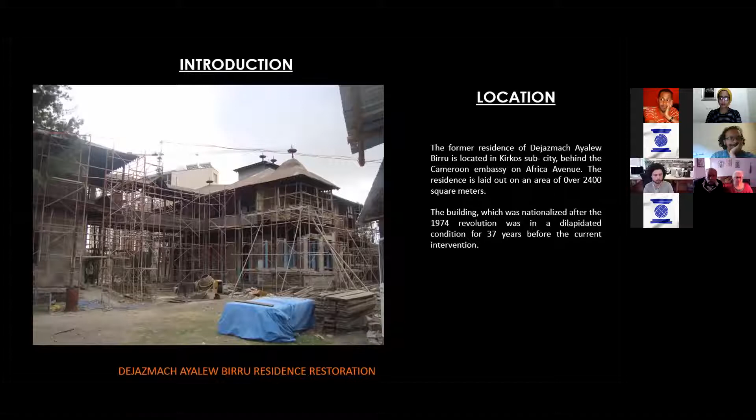So, like I said, the location is around Bole. You see this first picture, which was one of the first that we started upon. Before we embarked as an office on this project, the clients had gone through their own process of acquiring the services of a contractor, and through their tendering or selection process, they had selected Varnero, which is one of the leading construction firms in Ethiopia. So after they signed a construction agreement with the contractor, our firm was invited to come on board as lead supervisor and project manager as well for the project.

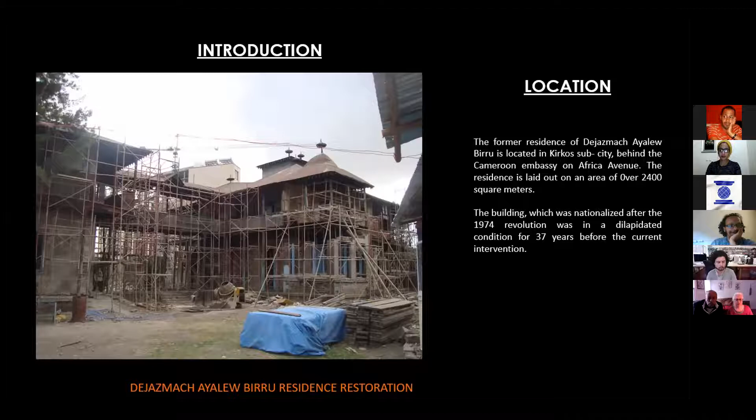So this picture that you see is the moment when we started erecting scaffolding to carefully start the renovation work. This house, like I said, is about 100 years old, and it has been abandoned. It has been in a very dilapidated condition, and the whole idea of this project was to restore it to its former age. That required a lot of structural intervention, because as you can see, except the main ground floor, which was built from masonry and was intact, the rest of the building on the upper floors and all around it, including the roof, the balconies, the bridge, and everything had to be carefully dismantled and reconstructed.

So the project had this program, and while maintaining its external image, it was also a project where the internal part had to be completely changed to cater for a new service. The developers wanted to use this as a guest house. Mind you, as caretakers, they are not allowed to use this as their own residence, because this is in a way a property of the city or the government, heritage. So they had to convert it into something that gave service to the general public. The idea was to convert it into a guest house. So with this understanding, we went into the project.

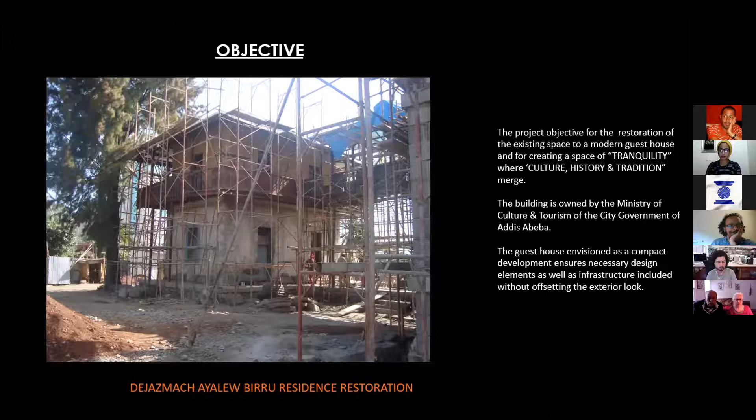The project team also included different members. We as BIGAR were the project managers, the main team overseeing the entire activity. In terms of architectural design, Architects was a firm on board, which developed certain preliminary designs on how to convert the house into a guest house. The interior designer's services were procured by the clients themselves. A firm called Gussen and Gossen, which is from Switzerland, was on board. Structural and MEP was fully our jurisdiction. It was all designed by BIGAR, and the contractor was, as I said earlier, Varnero.

So the construction of this project started in 2012, and I'm going to take you through some of the processes, what we went through, what we actually did. So some of the earliest images show how the windows looked; some of the areas, the balconies, were really in a bad condition. When we started dismantling them, the majority of the building structure is built from wood, but very strong wood. They used the traditional ted, that's in Amharic. It's a version of pine wood, very strong, and that's why it stood the test of time. But when we started dismantling the columns around verandas, the walkways and other elements, you can see the test of time had its bearing on this structure. It was really in a bad condition.

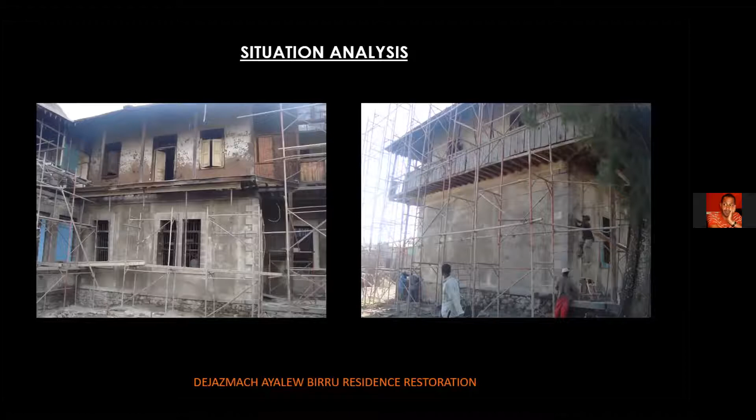On the ground floor, the building had a collection of different finish materials, some in cement plaster, some in mortar, some in different colors and so on. So to restore it to the original condition, a careful dismantling, peeling away of all these unnecessary elements was the first point of exercise. And of course, we had to be very careful not to structurally damage the building, and a full structural assessment was done before our intervention. For that, our structural design team did a careful analysis. We were guiding the process slowly so that the intervention of the contractor was carefully dictated.

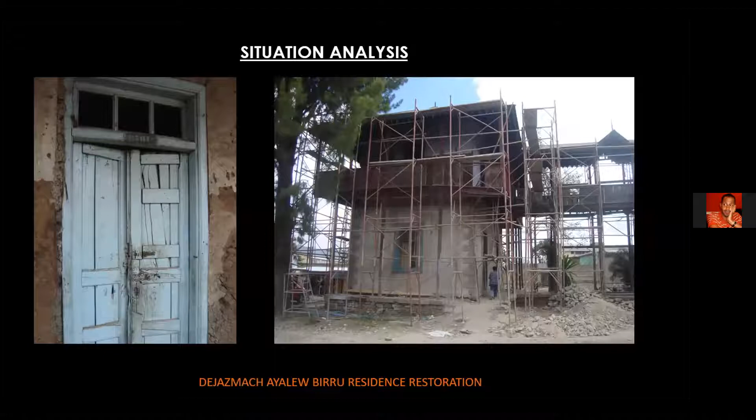We were fortunate enough to use the extensive experiences of Varnero, their wood workshop, and their craftspeople, which really helped us along the way. So first order of business, we started working both on the interior and on the exterior as well. But the strategy we adopted was we were going from the top down.

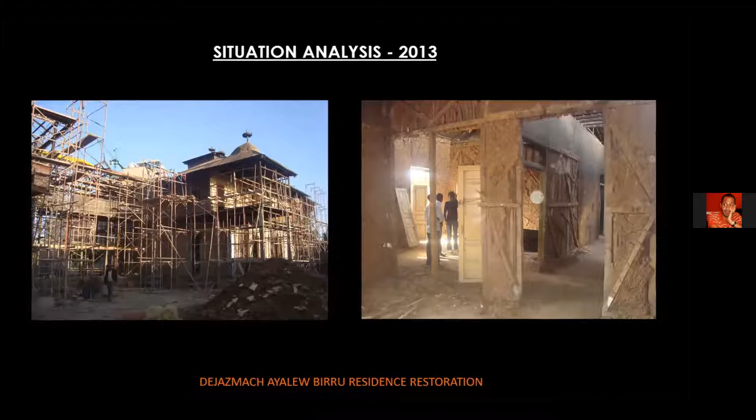So that means careful dismantling of the roof, amendment of the truss, careful replacement of these elements with equivalent material, and going down all the way to the bottom. So that's what you can see. We took down the roof on the top, and we had to replace, after cleaning, polishing, and preserving the structural truss elements, which were strong enough. So we had to redo the roof.

We kept as much of the original elements as possible. If these elements were structurally damaged or in a severe condition, we had to change them with equivalent wooden material, equivalent or stronger wooden materials, all properly polished and prepared as to the requirements of the structural engineers. On the interior side as well, we tried to preserve as many of the elements that were in good condition.

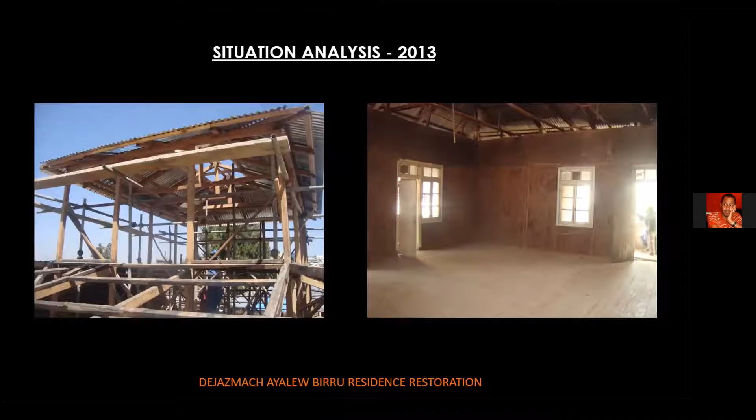So peculiarities of this project are, the upper floors are all built in a wooden structure, which were enveloped by mud plastering. The entire plastering of the wall was in mud, and of course a lime mortar applied as an exterior finish. When you go to the lower levels, it's all stone masonry, well-built stone masonry, and the entire plastering was done in lime mortar.

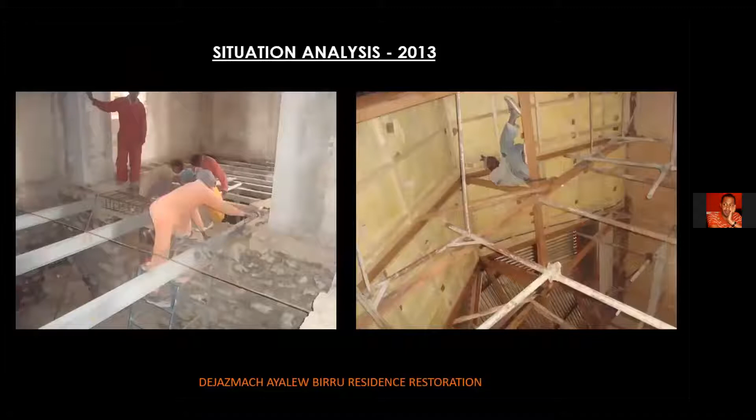And an interesting aspect of this project is it had a basement floor, all intact, but a little bit damaged, and with water encroaching, there was a lot of damp around it. So part of the engineering intervention we did was we carefully dug around the foundations of the building all around the perimeter and introduced a French drain or water drainage, so that the water can actually be diverted before it encroached on the peripheries of the building.

Simultaneously, we had to carefully do a sealing exercise of all the stone joints through cement mortar and a cementitious waterproofing chemical. It was all technically done in a very careful manner. Since some floors were damaged severely, we had to introduce structural section beams that can withstand the floor load, anticipating also the future function of this building as a guest house for quite a collection of people. We also were finishing up the roof structure.

Originally, most of the roof truss was covered by a ceiling, but we had to expose as much of it as possible so that it adds to the architectural delight. What you see on the right-hand side picture is after doing the corrugated sheet roofing, we had to do a bit of insulation on the top, so that from weathering, from sound, and from other aspects, the building is a bit comfortable. All of this will be covered with plaster boards.

So going into 2014, you can see that certain elements of the exterior, the wooden columns and others, were carefully being replaced, preparing them in the workshop, tested very well and graded to what we required. So we had to produce all of this and bring them to site and carefully start installing them on the lower levels, and simultaneously proceeding with the floor, the veranda on the upper floor, and then of course the columns following up on this.

On the interior part, we had careful introduction of wooden beams at areas that needed structural strengthening, because this intervention also required the strengthening of structural elements. Whatever was damaged had to be replaced, re-strengthened, and also catered for the services of the new function. On the interior side, you can see most of the walls all in mud plaster, and of course lime conveniently applied after that.

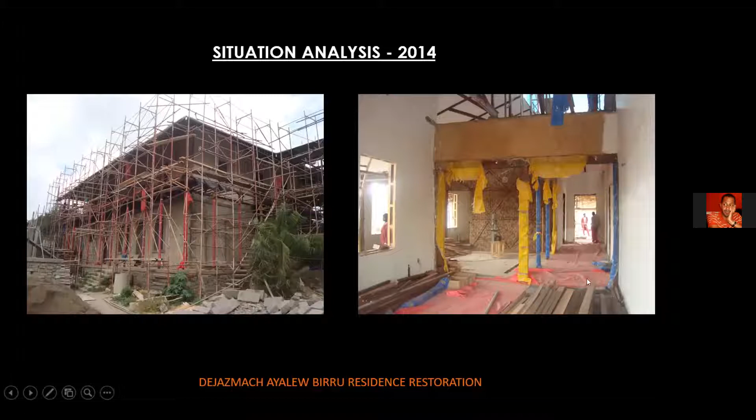Proceeding to the interior spaces, the corridors and verandas came next with the floorboards, balconies all done, and the columns also erected. On the interior spaces, the windows were a bit tricky because, when you work with a building built from mud, irregularity is an aspect we wanted to preserve. We didn't want to fashion it too much towards regularity, but to not affect the production of windows, we had to introduce wooden counter frames all around windows, label them carefully so that the windows were properly produced, and when they came to site, they fit exactly where we wanted them. So this was a very careful exercise that we did with the contractor.

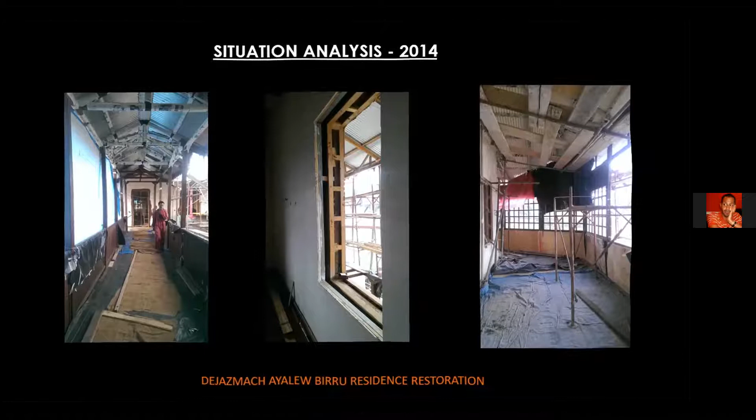Just one more thing on the previous slide: you can see in certain sections of the building where the roof truss was severely damaged, we had to literally dismantle, re-erect, and build it again so that it also connects with the structural integrity. So our structural engineer really helped in that regard, giving good direction and guidance all through the steps. This project was not done just in the office, it was mostly done on site. A lot of workshop drawings, detailed drawings, situation analysis and so on went hand in hand with the contractor's team.

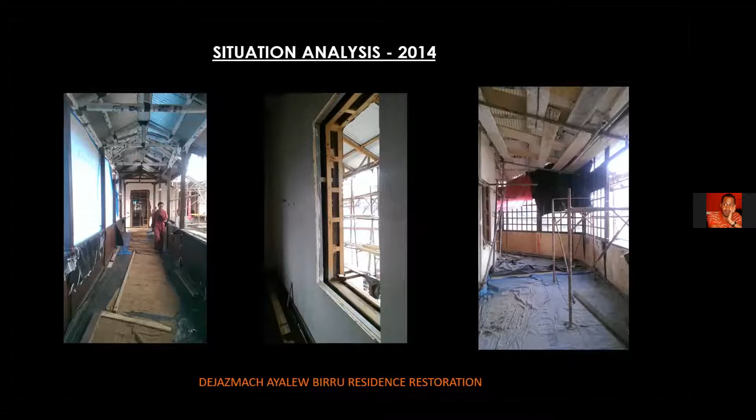So on the inside, again, in certain areas structural wooden elements were introduced, some were strengthened. The ceiling was pushed all along, following the profile of the roof, so that you get enough headroom, as well as the play of these structural elements also adds to the architectural delight.

An interesting aspect of one area: when we peeled off the layer to replaster it, to redo it, we were intrigued by the interesting shape of some of the structural elements that were behind the mud wall. So we exposed a section of it, and we preserved the mud from falling, but we preserved it in such a manner that we exposed the layer of the building, showing what was there, and we left it there as a piece of mural art.

In most areas, since this is a guest house, as you can see in the middle picture, we used boards with steel frames. Wherever we introduced water supply lines, drainage lines, areas that required future maintenance, replacement, or any unforeseen circumstances, we used plaster boards, because if you introduce this in a mud wall or in a stone wall, and then come back to chisel, you damage the very nature of the building. So for this introduction of new services, we played around with modern materials like plaster boards, conveniently helping us for future maintenance.

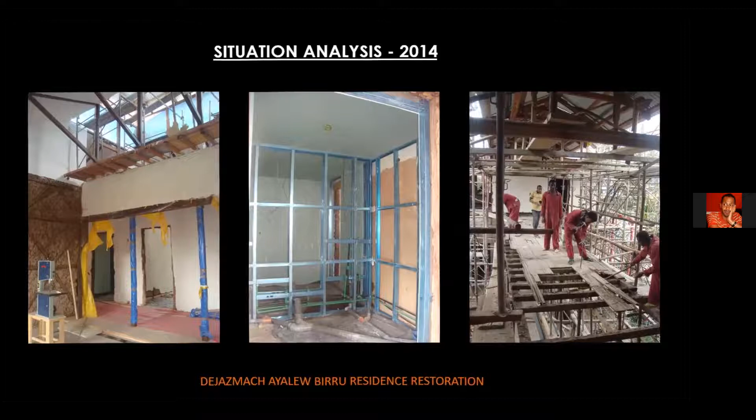So going further, here you can see the middle bridge, which was dismantled at the beginning, had been re-erected. A very interesting thing is, if you look at the image on the left side, we had to take down this element that's in the middle of the picture. It's like a veranda; it used to be a room, but we converted it into a veranda, a sitting space. And we had taken down each stone step by step. We labeled it, we polished, cleaned it, and we rebuilt it again exactly like it was.

But we had to take it down and properly anchor it with the ground and rebuild it from the ground up, because there was a bit of a challenge structurally, originally, because of certain defects that we found in the foundation. So this was all amended and rebuilt from the ground up exactly the way it was in the beginning. On the upper parts, the wooden columns continued, and the corrugated sheet, of course, is covering up the top parts.

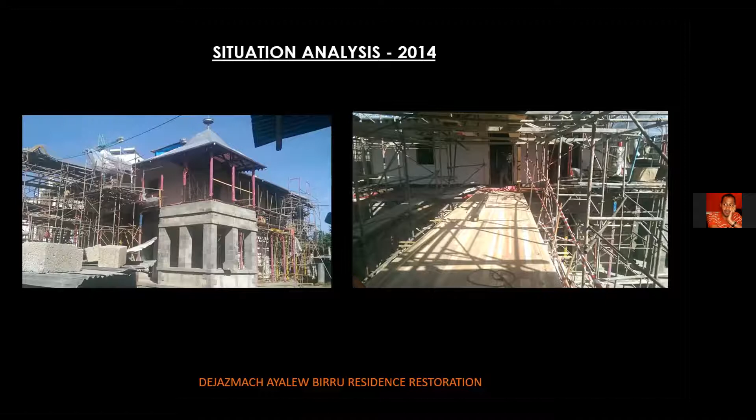So this is one of our favorite spaces in this house. If you looked at the original images, this was all covered in corrugated sheet. It was an abandoned space, but most of these things that were built during the 1900s had, in some of them, these typical clerestory lights; light comes in through the top section. They played very well with colored glass windows. So we also created a system where we brought this gallery of light into the interior, and all of this goes right onto the corridor, leading into the sitting room of the first floor. So the brilliant play of light, especially in the afternoon, is a delight to look at.

All of the truss that you see was original. It was from 100 years ago. We just took away the corrugated sheet, replaced it, and we polished all of the wood. Look, some of the wood is a bit irregular, right? It looks a bit organic. This was the original truss. We just preserved it, we polished it, we varnished it, and we used oil for marine wood and so on, to strengthen it and keep its color. But when you look at it, it's pretty much what was there, but this time it is exposed to add architectural delight.

Of course, going into 2015, the building slowly starts taking shape. Imagine 2012 to 2015, 3 years, careful exercise. Everything had to be done carefully, dismantled, re-erected, and put to resemble its original condition. If you look at the image on the left-hand side, the villa with the gallery of glass that you see, it was not in that condition. It was completely destroyed when we started on our original restoration.

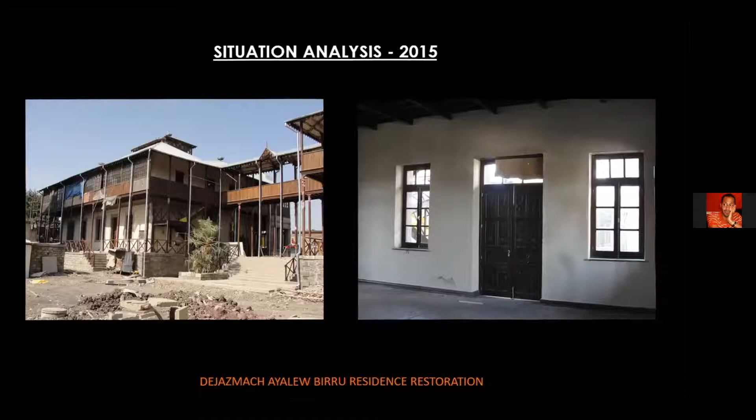The whole area where this building rests is over 2,400 square meters. It's just about in the middle of this property. So it allowed us to play with a lot of landscaping around it.

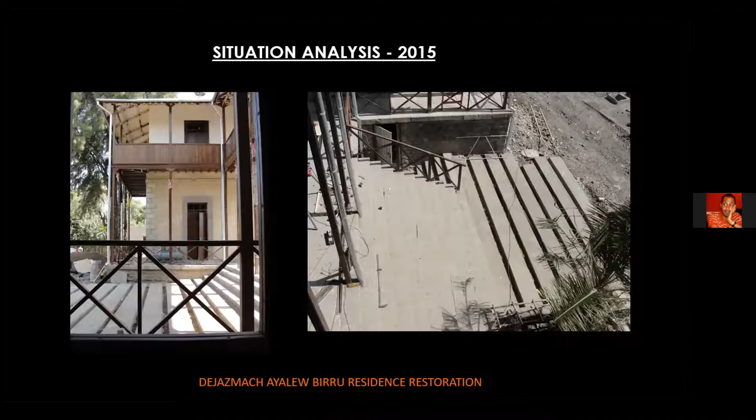Interior spaces taking shape, the doors all fitting, the glass allowed a little bit of transparency. The space which we were going to fashion into a sitting corner for coffee ceremony and others was taking shape. On the side, if you have noticed, we have put insulation on the roofing structure, for heat, for sound and so on. On the corridors, we just painted the corrugated sheet in white color. The contrast with the dark brown of the wood was just excellent. The wood is always amplified, and it was the main element of the architecture.

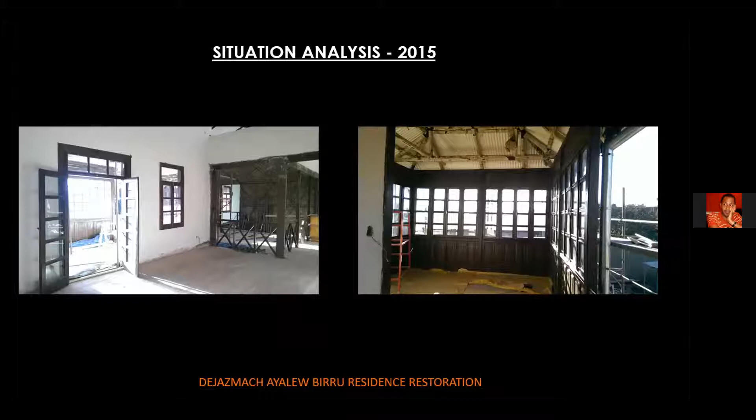So again, the wood and the craftsmanship was really a beauty, a delight in this building. The perfection, the execution, all of what you see there, we produced all the detailings, all the specifications, right down to the type of member to be used. And we are really grateful to the team of Varnero, without whom this project would never have been achieved.

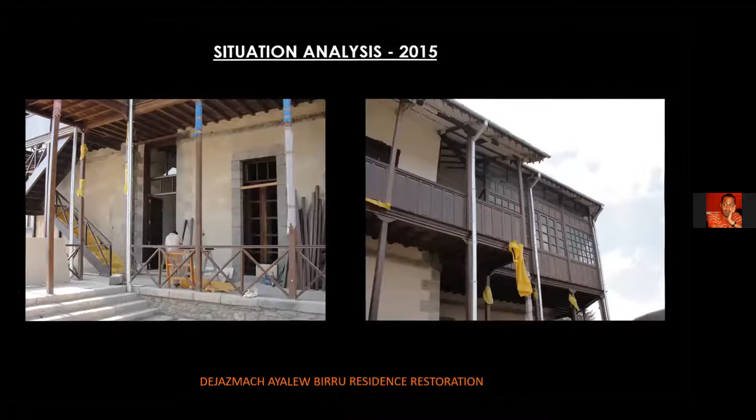Building taking shape, most of the wooden elements from the outside varnished. By the way, it was a continuous journey of rectification as well, because some of the columns we delivered had a little bit of warp in them. These were seasoned wood. They had to be prepared in the workshop, dried and then delivered to site. And over the course of this 3-4 year journey, we had the winter season, we had the summer season. Some of them changed character. They had to be carefully dismantled again and reintroduced.

So it was a very interesting journey. This was like a live project. It was not something you just were done with and closed. No, you had to work, you had to check, working with elements where, at least from our experience, we had to learn a lot from site, from the nature of the materials. And it was an interesting experience.

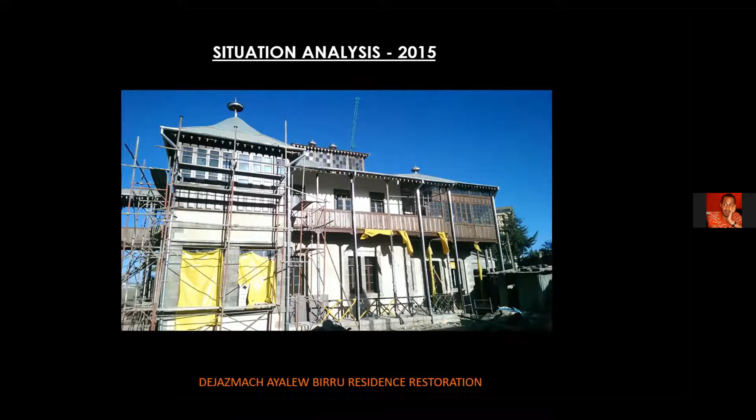Building taking shape, we were coming out into the landscape, designing the footpath, the green areas, the type of vegetation. By the way, one thing which I failed to mention, landscape architecture was also handled by Bigar. We have a landscape architect who works with us, so we worked with her in the selection of the species of plants and the type of the garden.

And the owners were very much involved all throughout this process, because had they not been the patrons of the arts that they were, we could never have achieved this. They were very much involved, very careful about the selection of material and the ambience they required from the building. And of course, we also had visits from the Ministry of Culture and Tourism, who made sure that the exterior look of the building was preserved to its intended target.

So, most of the wood elements in the lime plaster taking shape. Now, it was paving way for the fitting of the interior doors, some of the interior elements, the lighting and others. The interior lighting, furniture and everything were carefully selected by the interior designer with a continuous dialogue with our team. And it's also an interesting journey.

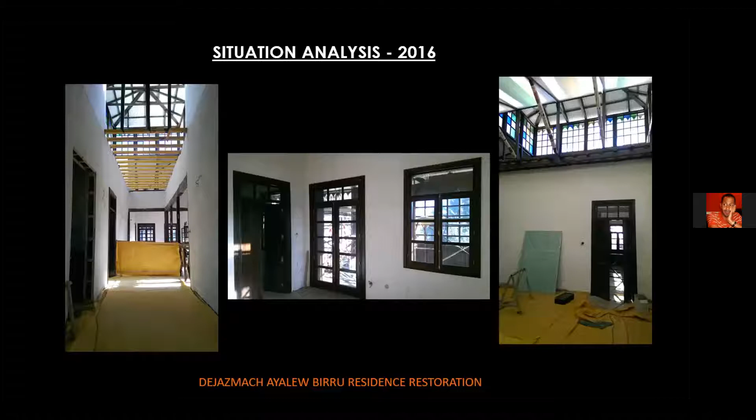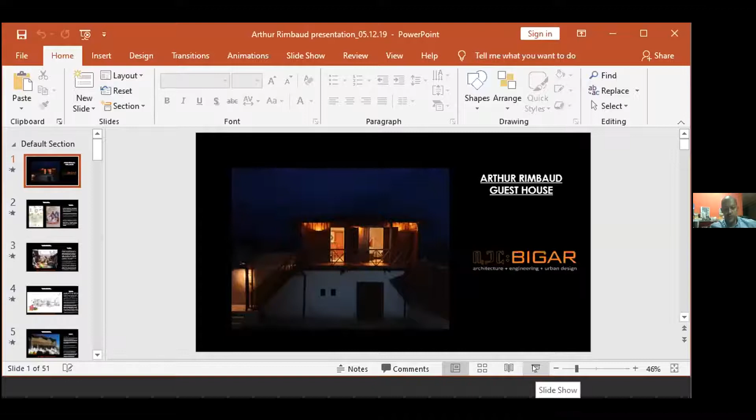I'm going to take you on a journey to the east of Ethiopia, or to the east of Addis Ababa. Harar is one of the oldest cities in Ethiopia, reputed to be over 1,000 years old. The beautiful city center of Jugol is a UNESCO World Heritage Site. And our next project is located right in the heart of Jugol, within the compound of the Arthur Rimbaud Museum.

Arthur Rimbaud was a famous French poet, prodigy, artist, adventurer, and soldier of fortune, some try to call him, but such a remarkable individual. He lived in Harar for a brief period before he sadly passed away at a young age. He left a lot of memories, and some of those memories are preserved in Harar, in the Arthur Rimbaud Museum, where his poetry, his works, his paintings, and some books are preserved for everyone to visit.

This project originally started in 2013. The city of Harar and the city of Charleville-Mézières in France were sister cities cooperating, and very much also connected through the history of Arthur Rimbaud.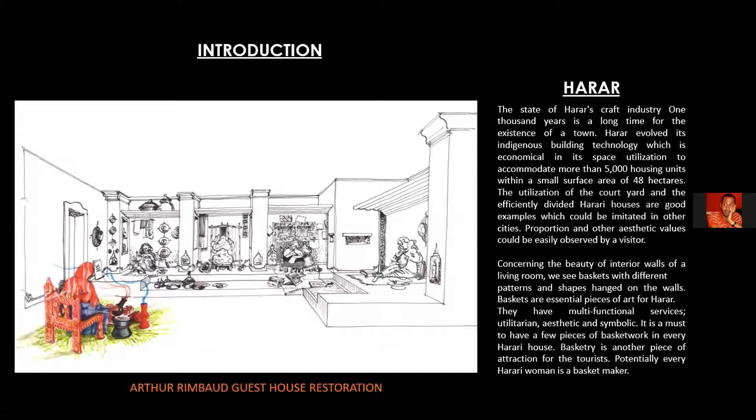What you see on this picture is the Rimbaud House, or the main building of the Arthur Rimbaud Museum in Jugol. The journey started back in the 1970s, early 1972, when the then French President Pompidou and our Emperor Haile Selassie, who also lived briefly as a young man in the city of Harar, where that influence of culture is also part of his legacy, started this conversation about creating a place of remembrance for Rimbaud and the special place he has in Harar and also in France.

So part of it was the creation of this museum, a story building. At the lower levels, you have the library with quite an astonishing collection of books on Arthur Rimbaud, while on the upper part you have a magnificent gallery where you see a collection of his sketches, pictures, and poetry. There's one poem which I would like to recommend to everyone on this occasion. It's French. It's called Le Bateau Ivre. I will simply type it in the chat section later. You really have to read that poem to see the magnitude and the capacity behind Arthur Rimbaud.

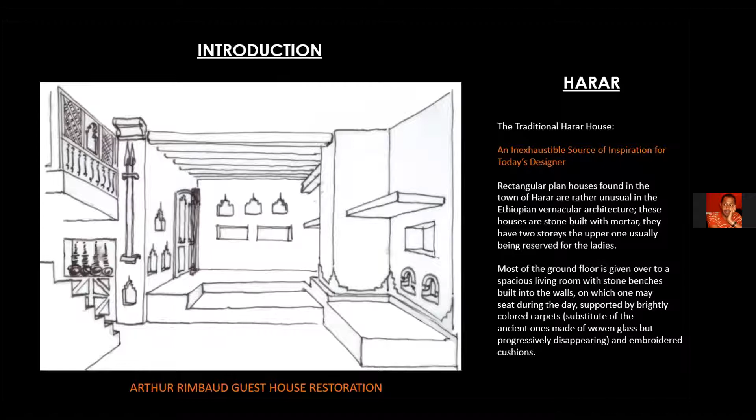So the other thing, apart from the special relationship that Rimbaud had, was a closer study of the architecture of the Harari house. The Harari house is unique in terms of its space organization and the clever arrangement of spaces. In a very small space, the Harari tradition allows you to use different niches, different corners, different enclaves as areas where you can store different elements of the household. Those elements create a unique architecture, and the spatial arrangement was one thing we took as an inspiration and studied closely.

So this is the house. When you enter into the courtyard, this is what you see in front, and when you turn to the right, this is what you see. In the image on the left-hand side, you see the door on the lower end, and you come through that door. In the courtyard you see the Arthur Rimbaud Museum, and on your right you see this house, which you access through a single stair. It is suspended above the Jugol wall, and it is used as storage. It's a very small space of about 35 square meters. So the idea was, on a limited budget, to see how we convert this into a guest house.

So we started studying a fully furnished Harari house: the sitting position, the artifacts, the color, the elements. This ambience is really unique, and it gives an interesting dimension to a residential building. The artifacts and the ornaments around the doors and different areas of the building were something we wanted to take as inspiration for our restoration projects. Elements in the arts, the basketry, the weaving; there is so much intricacy in what the Harari people do, so much art and craft that we can learn from.

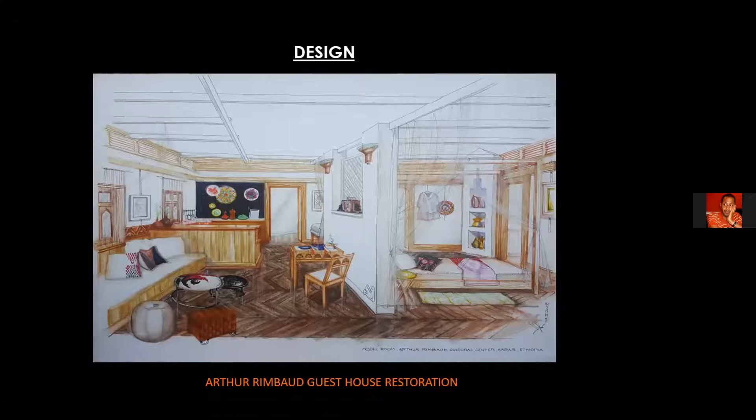So technical drawing to be produced, and we had to get a guest house with a sitting room and sleeping quarters delineated, but not strictly. There had to be movement all around. It's quite a small space, and then we had to carefully select an area where to put the bathrooms.

There were acute angles, sharp corners. So we cleverly played around with the positioning of the hand wash basins and the bathroom areas, which conveniently fit in those, and you can see that on the right-hand side, part of this house was built in masonry. And the fact that it was built in masonry allowed for protection with damp proofing and allowing pipelines to run within the interior.

The rest of the house was all built in wood. So we reserved a large portion of that for the sitting room and the sleeping quarters. It has a lower level, and there you can see in the middle is the walkway sitting on Jugol, and the one on the right is the lower level of the house, which we reserved for technical rooms, storage spaces, laundry spaces. This is a guest house.

You have bed sheets, you have different elements that need to be continuously washed, dried. So there's a space for washing, drying, water storage, generator, all technical, electrical distribution board. So control, maintenance, it can happen in the lower level, which is pretty much a functional space, while when you go to the upper levels, it's all fully functioning guest house.

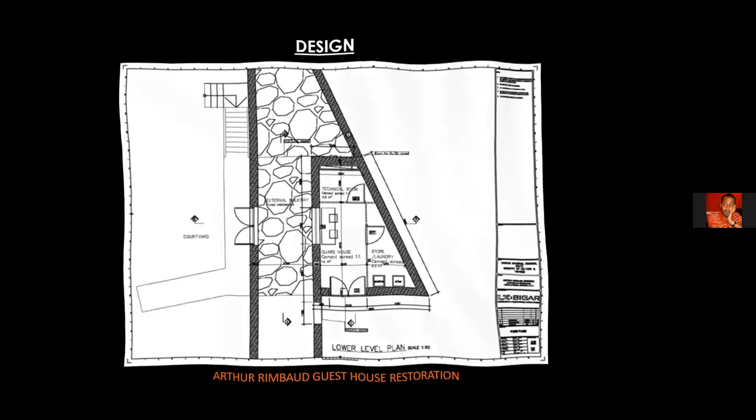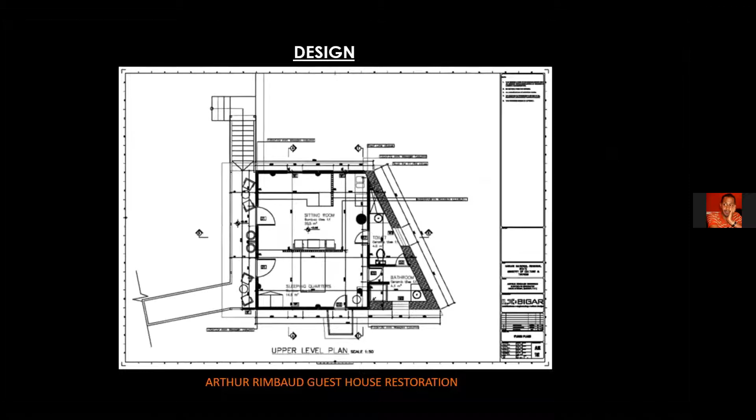And of course, communication was done not only, when you look at the earlier pictures, through very strictly regulated technical drawings, specifying each dimension, material, very well coordinated for purposes of technical efficiency. At the same time, we never left the architectural verve that can only be enjoyed through sketches

where we provided description of the different elements of the architecture, the floor type and material, the elements of the wooden cladding, some of the niches where they had to be introduced, the wooden architrave and wooden skirting going all around the building, ceramic tiles where we want them to be positioned. We appreciated and also capitalized on the uniqueness of the hand sketch, which elaborated and very well narrated what we wanted to convey as a message to the contractor.

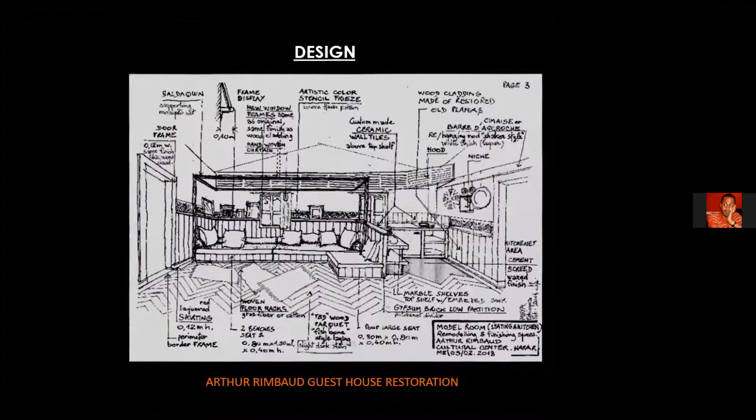So we started the journey, and like I said, we stripped down everything to the bare minimum, and the most important structural elements were left in place, while the rest of the cladding and other elements had to be stripped down. The wall had to be peeled away to understand what was behind. So some of them we had to preserve, some of them we had to carefully remove.

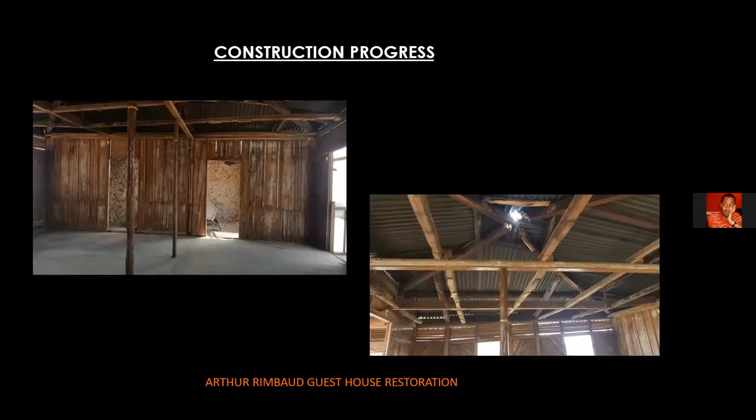So the first part of the exercise was we had to lay the ceiling along the angle or the slope of the corrugated sheet, so that it gives you more headroom, and careful structural renovation of re-strengthening and replacing of elements happened.

The whole project, by the way, was a one-year exercise. We had a project period of 9 months, but then we extended it by 3 more months, for certain elements to be polished. So, as-built measurements, what is the situation on site? We had a pre-drawing based on site measurements, but once you start removing elements, you are in for a surprise. So improvisation was really part of the program.

We worked hand in hand with the contractor's team. It was not a matter of just delivering a drawing and walking away. Unless you work with a contractor, you can never get the job done. So you see the strengthening of the roof truss.

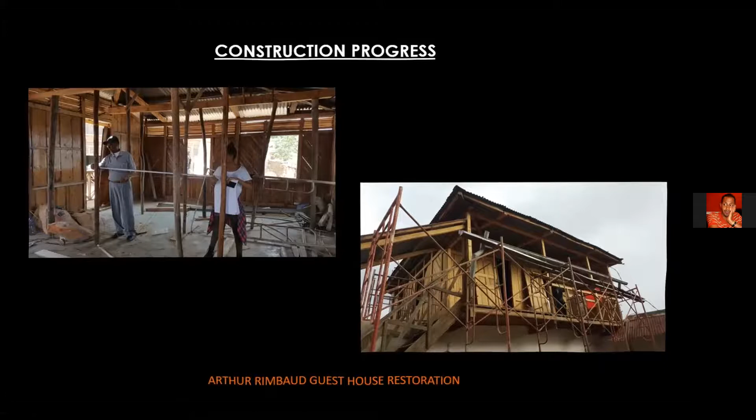We introduced steel brackets. To my architect friends who were a little bit conservative about introduction of modern materials, this is my message: the efficiency and the possibilities that steel provides are phenomenal. We can still also do this with wood, but the cost factor against efficiency, availability, and the degree to which we can manipulate are factors which you have to take into consideration.

A very flexible frame of mind, going for different possibilities and different techniques, is very important when you're looking at a project with a very tight budget and a very tight timeline.

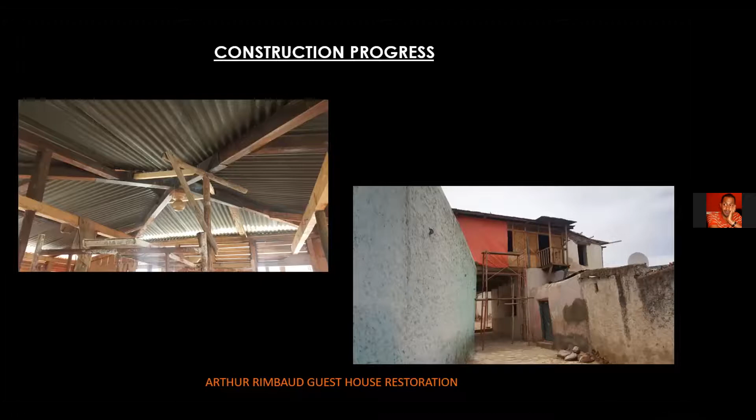Interior elements: careful replacement of wooden elements on the wooden wall elements, careful re-strengthening of elements that were worn out, and the replacement and amendment required, step-by-step interventions.

You can see on the left-hand side, we started introducing the electrical power, switches and sockets, and all of what you see on the interior, all of this element, we lined up with plaster boards. Plaster boards allow you to give an even, fuller surface finish on the inside that the guest house required. And at the same time, it allowed us to conceal most of the elements like the electric elements, plumbing, and so on behind it.

We used cement boards, 9mm cement boards, fire retardant from 60 to 90 minutes, water repellent all around, water resistant. This thing, you can use it on the exterior, and it can be 4 or 5 years. I've used it on other projects as well. It will not wear down. At the same time, it is also impact resistant. It can withstand impact. So materials were carefully selected for the interior conversion, while we kept the exterior pretty much intact.

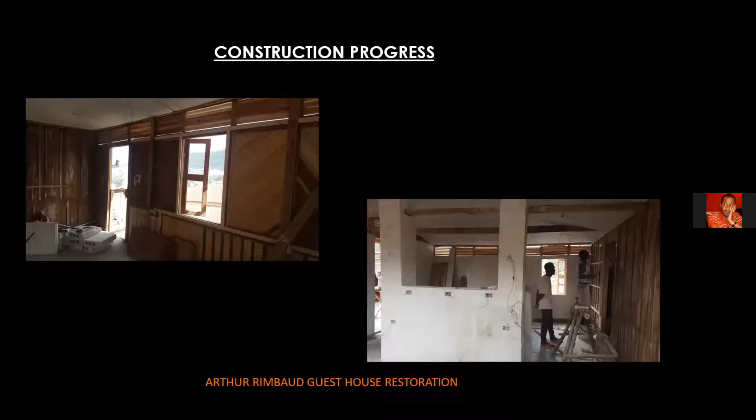So, at this stage, we had to put the ceiling on the interior space, the left-hand side picture. Part of the elements that we believed were interesting as part of the renovation, we exposed them, so they become part of the architecture. The ceiling raised a bit, and the fact that we were going to plaster all of it in white color creates a bit of spatial liberty, because if you work with very dim colors in a very tight space like this one, it can feel constricted and suffocating.

The suspended floor is a unique feature of this building. You come on the streets of Jugol, this is what you see. This is the bottom of the guest house before entering into the Arthur Rimbaud compound. But it's interesting when you look at it from the bottom. So we preserved it. We put all the elements in place, applied paint, and enhanced it, so to speak.

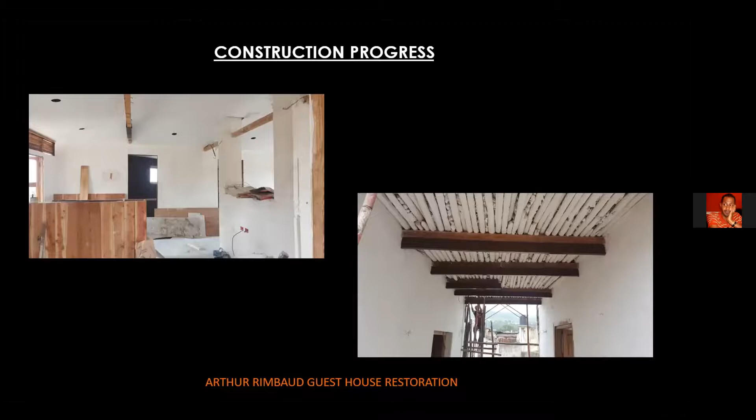So working hand in hand with the contractor's team, gypsum up in these pictures, plasterboard all in place. We also simultaneously started working on the wooden cladding on the bottom part, to give it a bit of character. We wanted to play a little bit with the wood, and it was also part of the contrast. The bottom base is all enveloped in this wooden element, which signifies a bit of warmth, while the upper part is all done in white.

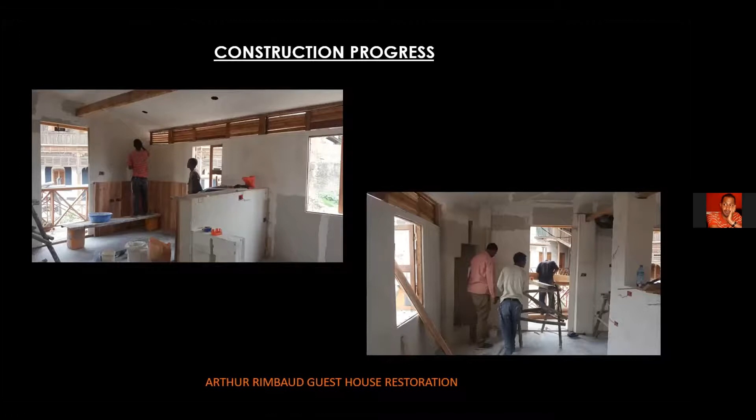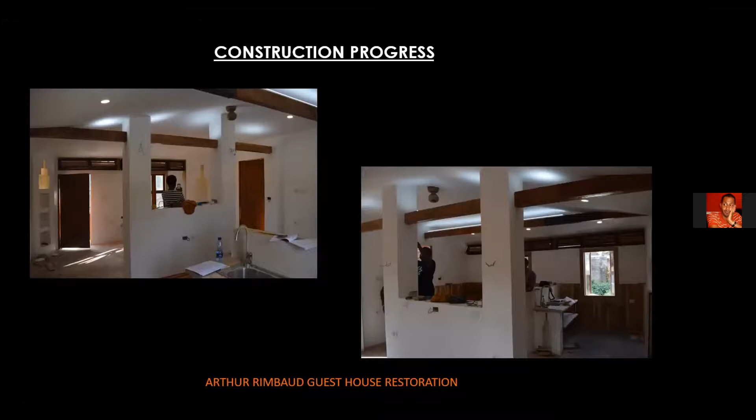We had to carefully balance the application of wood so as not to overwhelm the space, but also to contrast it with the white color and the expanse that it can create. So slowly taking shape, the building: wooden elements carefully exposed, part of the truss, wooden doors. We had to preserve them, polish them, varnish them and bring them to their original state. And in the interior space, the switches and sockets, all white, so as not to take away from the aesthetics, were all introduced.

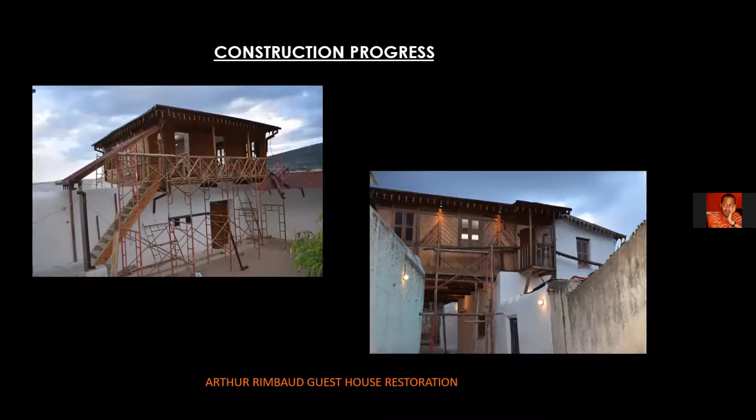So, at this stage, we finished our wooden floor, all done with TID or the Habashine. And then we introduced elements there for hanging pictures and other memorabilia from Arthur Rimbaud's history, which you will see in the other pictures still to come. The Musharabiye is a very interesting feature of the Harari house. So we introduced it, we created versions of it to delineate the space between the living area and the sleeping quarters.

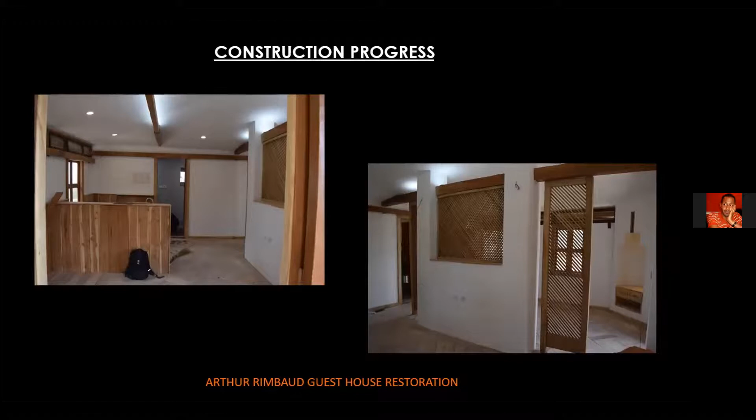The wood, properly polished, and after application of wax, we walked barefoot on this floor to check if it is properly in place, because you remember the earlier one was a cement finish, so we had to chisel a part of it, remodify it, and completely apply this wooden floor, which was a much better upgrade for the interior.

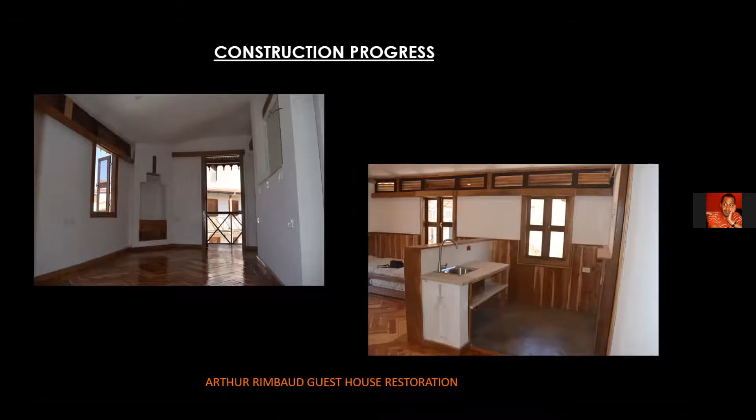The kitchenette on the right-hand side picture is a wet area, so underneath, we didn't compromise on technicalities like, as I said, fireproofing, waterproofing, and so on. We gave it a lot of attention. So the floor under the kitchenette here is a polished concrete floor. It's waterproofed underneath because this is a wet area, a wet space to work in.

We started working in the bathrooms, so we used elements of treated wood, this pine or the tid again, but treated and varnished with a special chemical to protect it from water. The bowl, all these hand wash basins, we had to look to the market. We extensively looked at different suppliers, different places all around Addis to find these unique shell elements, because this is not something you go into a shop and buy, especially in Ethiopia. It's very difficult. So we improvised as much as possible with what was available.

And just like the kitchen space, look at the floor, it's polished concrete again, but the ruggedness and the roughness and the irregularity was welcomed, appreciated, enhanced, and became part of the architecture. We did not make it very clean, polished, neat, so it would have defeated the purpose of the irregularity of the elements, which bring their own vigor to the architecture.

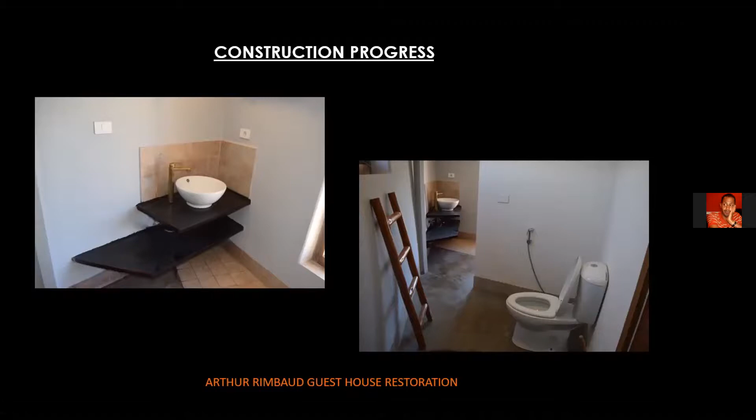And we really worked on this project as a crafts project, like I said, working with an interior designer with his heart very close to the crafts, and also an artist who was hands-on working on our projects. We ourselves appreciated the crafts and working with the hand and the ruggedness, the roughness, and all those elements to be introduced in the design, so that as much as possible, we didn't want this to look very organized, rigid, but we wanted to make it a bit interactive, a bit irregular, a bit rugged.